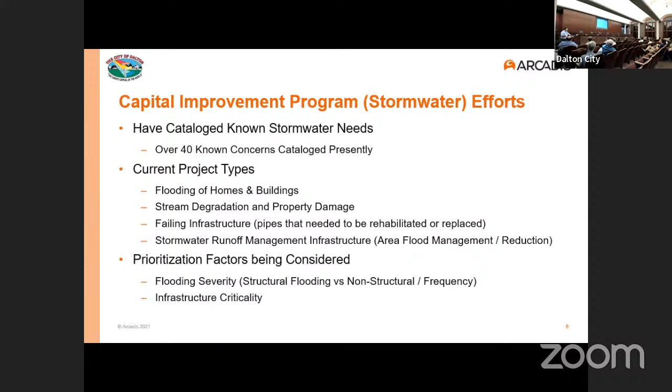Citywide modeling: Arcadis has created a hydrologic model for the entire city. This essentially allows us to pinpoint specific areas within the city in which our stormwater efforts need to be focused, as well as areas in which we will get the most return from these projects that we're proposing.

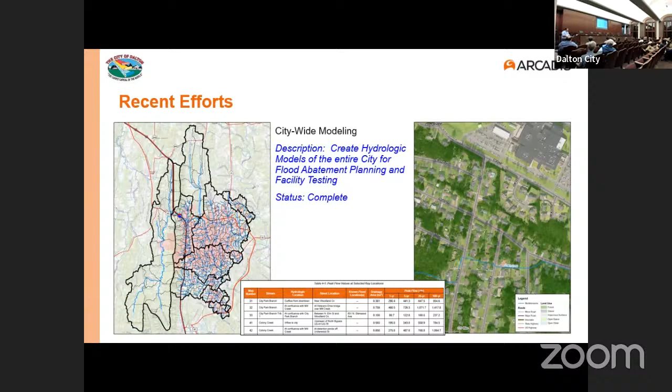Two projects completed last year and earlier this year. Covie Ridge Detention Pond: this was an existing sediment pond from the Covie Ridge development. We essentially expanded the footprint of the existing sediment pond, increasing the total storage. This helped alleviate downstream structural flooding as well as street flooding that was occurring below this project.

Brookwood Drive, this one is essentially the same scenario as Huntington Road. Through voluntary participation from the property owner, we had a willing seller with known structural flooding issues in which we were able to acquire the property, demo the house that was experiencing the flooding issues, and install a flood storage facility to help mitigate flooding concerns downstream.

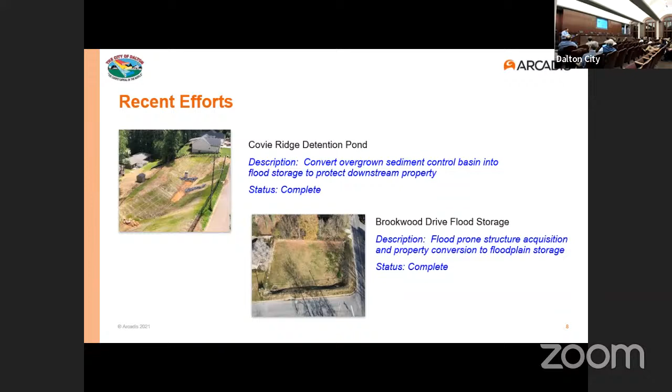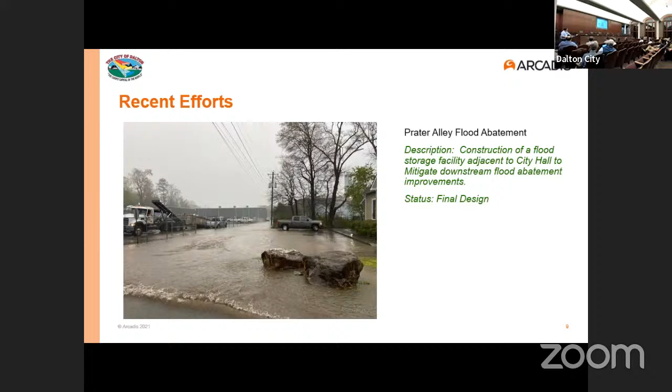Prater Alley, this project is in the final, final stages of design. We'll be going to bid on this project soon. This is a proposed flood storage facility immediately adjacent to City Hall here, and it'll mitigate downstream flooding as shown in the picture provided.

The West Hill Detention Regenerative Stormwater Conveyance. This is the construction of a linear flood storage facility, as well as upgrading existing detention ponds to facilitate future drainage system upgrades. This all being done to ultimately prevent known structural flooding issues within the drainage area.

We are currently in the procurement phase of this project and look to start right after the first of the year. So the city, as well as Arcadis, is extremely excited about this project. To our knowledge, the regenerative stormwater conveyance portion of this project will potentially be the only one in the state that we're aware of.

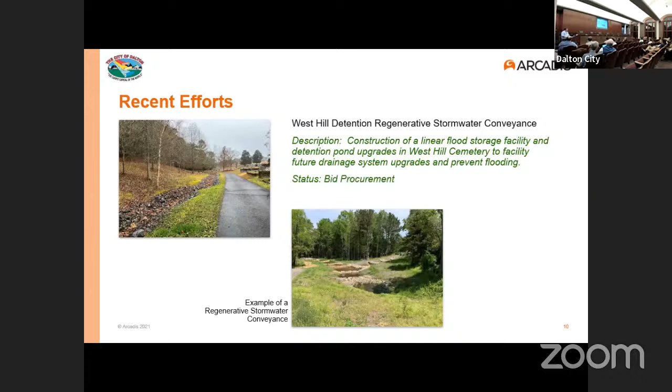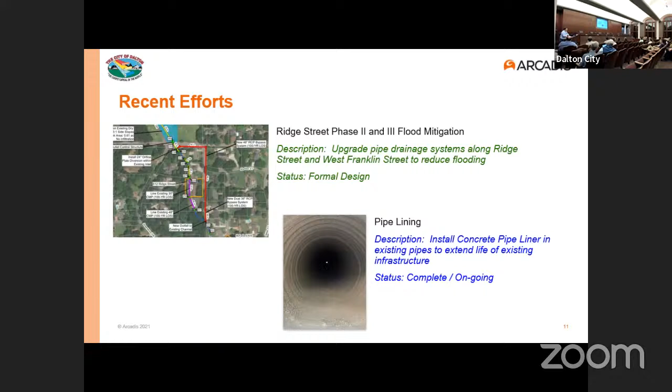Ridge Street Phase 2 and 3 flood mitigation. This is immediately downstream from the West Hill Cemetery project. We are currently in the process of installing pipelining on the existing dated infrastructure, as well as in design on what we're kind of coining as the bypass system, which will essentially take some flow out of the rear of the residences within this drainage area.

Glenwood Avenue, this one is in the design phase. It's upgrading pipe drainage systems along Glenwood Avenue and North Elm Street, where known flooding is currently occurring.

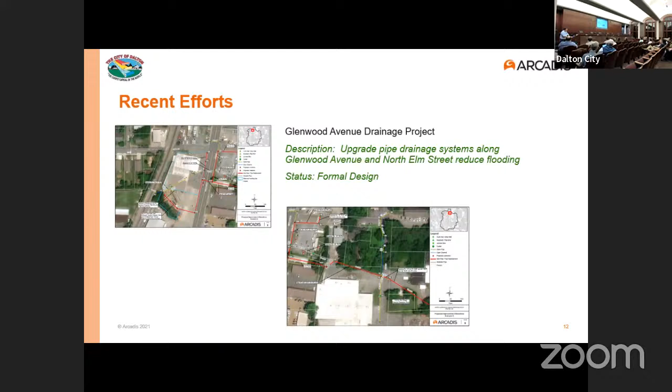Needless to say, there's a lot going on. These guys have put the pedal to the metal, as they say, and they've got a lot going on in process right now. So tonight, we're here to talk about McLellan Creek, which is one of the major areas of concern in the drainage catalog.

I always like to say I'm a drainage nerd. I don't know how many of y'all know where the water that comes off your properties goes, for those of you that live in the McLellan Creek watershed, but all the water that leaves your property ultimately winds up in Mobile Bay, Alabama, through a whole series of rivers. It just continues downstream, eventually travels over to Alabama, goes south, and then dumps out in the bay right there. So if you're ever going out I-10 like you're going to New Orleans, you're going over Dalton, Georgia water.

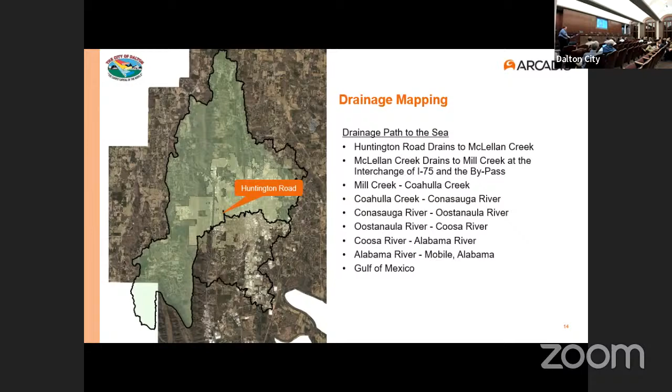All right, so let's talk about McLellan Creek itself and what makes this drainage basin a little bit unique. Obviously, y'all's flooding problems are a little bit different than what you'd have down in South Georgia on the coastal plain. You're not even in the Piedmont area, going north of Macon, Atlanta, those areas. You guys are in what we call the Ridge and Valley system of Georgia, which means we have broad, fairly flat valley bottoms with very steep sides.

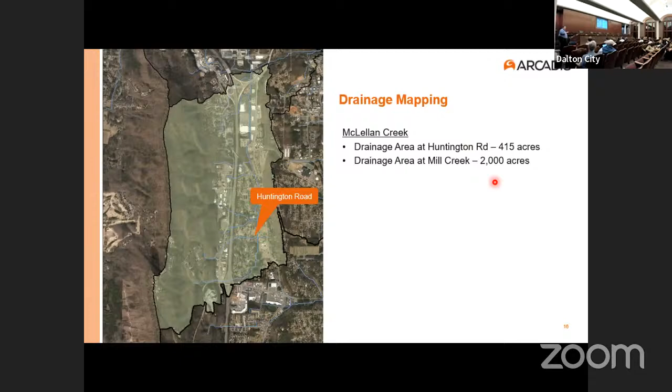At the outlet, if you go down to the bypass where McLellan Creek crosses the interstate, we've got about 2,000 acres of total drainage coming in there. At Huntington Road, that's about 20% of the watershed, catching about 400 acres. So if you're standing on Huntington Road right at the culvert looking downstream, that's about 400 acres coming off the mountain and down to you right there. That's why it's a small creek when it's dry, and a little larger when it's not.

Just to give you an idea, zoomed in here we've got Tibbs Road, I-75, Huntington Road, and these blue lines are the main drainage areas that come through the area. The main stem of McLellan Creek comes off the mountain over there by the conference center, comes under the interstate, then turns north and heads towards the bypass. Off each of these little hills, you've got individual drainage basins and small tributaries coming down the hill contributing.

As Andrew and Chad alluded to, we've been working on a lot of areas. The two biggest areas we've focused on have been Walnut North and McLellan Creek. We've been working on the McLellan Creek model because we want to make sure we've got this modeling in place so that whatever we do, we don't make things worse. This is a tricky little drainage basin, and we want to make sure we can model that from whatever we decide to do, and wherever we decide to do it within the watershed. We want to be able to say, okay, if we do this here, here's what happens downstream of us. That's why we've been working on it, just a little behind the Walnut North area, which for those of you who were here last February, is what we talked about.

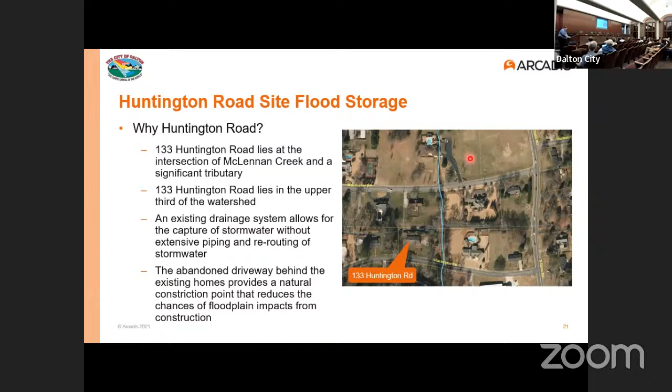What we would do is pick up the water coming through this drainage system, and instead of letting it go down and dump into the creek here, we would send it across the road into this detention facility, hold it temporarily, and then discharge it. We've got about 26 acres of drainage we can capture right there, about 6% of the watershed. We think we can get 2 to 3 acre-feet of storage into that facility.

To give you an idea, an acre-foot is 1 acre of land, 1 foot deep — about 326,000 gallons. So we think we can get about 1 million gallons of storage in a detention pond there, maybe. We'll store it temporarily and then send it into the creek at a much more measured rate, hopefully providing some good benefit to the creek.

To give you an idea of what that is, 2 acre-feet is roughly the equivalent of about 1.5 to 2 inches of rain. So a 2-inch rain event could come in and we could just hold it there. Obviously we're going to design it to maximize the benefit on the creek, so it'll probably detain a good bit more than that, but that gives you an idea why we're looking at this particular area.

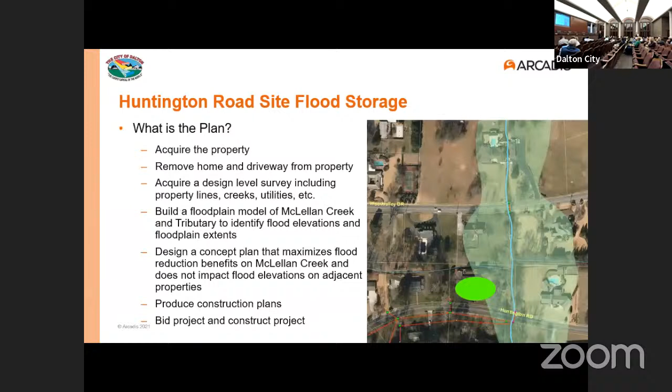Very valid question. As part of our requirements with the EPD, we do have to do testing. I don't think we've tested this particular water.

This facility will have a control structure that allows us to remove that. It will be settled, any kind of solid debris that comes and collects in that, and the public works crews will be able to maintain it.

Your point is valid. That bluish area is what would drain into the pond under this proposal, so there wouldn't be any interstate water. This will just be water in the subdivision that flows down to the pond - we're not pulling water from Walnut Avenue or the interstate. This is just meant to control the water coming off the subdivision and throttle it back so that McLellan Creek can hopefully go down a little bit.

Yeah, that water coming off the interstate is coming through this blue line right here. And that will not go into the pond. That'll be adjacent to the pond, so it'll continue to go behind the house. Remember, we can't dam up the creek, so yeah, we're not damming that up.

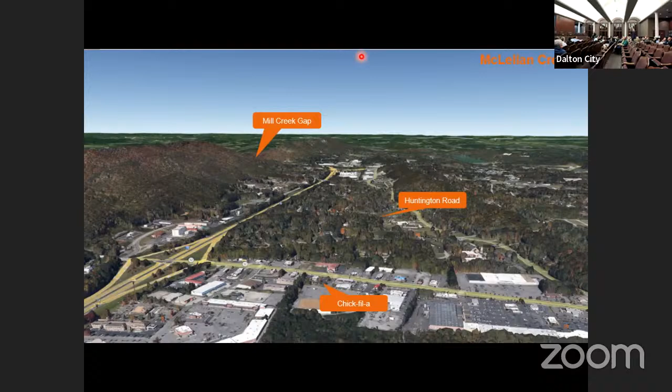Hello, I'm David. I live up on top of Huntington Woods Way Hill, so I don't have a flooding problem, but I'm interested in what goes downhill and what everybody else catches at the basin. I run around that block, I cross that creek twice and see where it runs through. Every time we leave our house and come back, past this lot, we have to look at it coming and going. Right now it's pretty nice to look at, so I do have concerns about anything else that's put there.

And your statement of the foot acreage that we could cover, what is the acreage actually of the retention pond itself? It's not a huge lot. We don't know, the lot's a little over an acre I think. The pond won't be the full size of the lot because there are some state mandated buffers, and we don't know what the final size of the pond's going to be because we haven't done the modeling of the floodplain yet.

Obviously we don't want to flood the neighbor by pushing the water off that property onto the neighbor's property. So your only option then to get 2 to 3 foot-acres of retention is to go deeper and deeper on it. Yeah. And if you were going to use just a gravity fed controlled thing to let it run over, then you're counting on filtration, absorption to empty the pond. You can't go any... yeah.

Well, if you have back-to-back rains, it's not doing much good - it's still flooded the rest of the time. So to get 2 or 3 foot-acres in there, because of the graduation of the slope that comes down to what you're going to get, you're going to have a 6-foot ditch over there. Is that about what we're looking for, the depth and the dam you have to build around it?

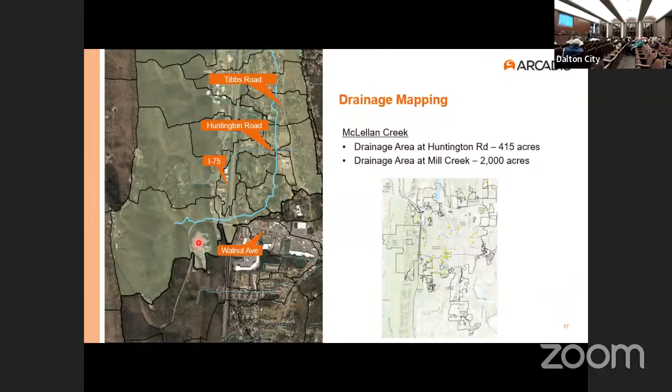I heard the question addressed a while ago about maintenance, i.e. mowing the lawn, taking care of landscaping. You mentioned earlier something about having to do maintenance in the pond. My first question is, is that something that would happen frequently? And if you could go back to the visual of what we think it'll look like.

So if I heard earlier, there would not be a lot of water. The water would not continually be in this pond, correct? So when the water's not in the pond, it's a brown hole. It would probably just be a lawn, like green grass. Yes, sir. It would only hold water when it rained. So think about a low point in your yard - it fills up with water, and after it stops raining, it drains out. This would be the same way.

Again, this is not a final landscape plan, this is just an idea of what it potentially could look like. But as far as regulation, this pond would be regulated under the MS4, the city's MS4 permit. So there are maintenance requirements, but typical maintenance on a pond like this is mostly mowing, removing any debris that washes in, and depending on the landscaping, maybe some trimming. But as far as maintenance, it's almost like a lawn.

I appreciate that, and I know you guys are working to solve through something. I appreciate the effort going into this. I live directly across the street. I'm worried about what I'm going to be seeing besides the all good beautiful home. I'm worried about my property values. I get it, we've got to solve for a problem, but that's where I am. I know that's where the McCameys are, and that's where the others around them are.

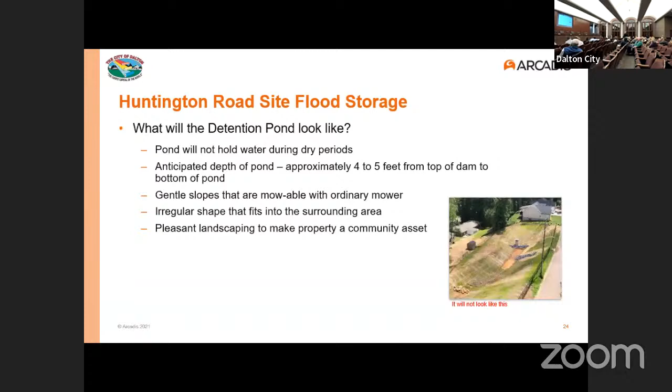If you go back to that slide, 26 acres that you see in the blue, 26 acres. Your problem is what's coming off the interstate, but as I've tried to explain, we're also concerned about the residents downstream, those pictures I showed you. It's 2,000 total acres, and we've got an opportunity to do something we think will provide some marginal benefit.